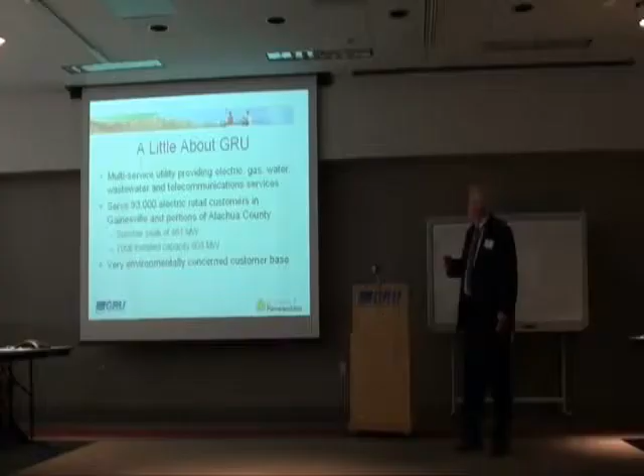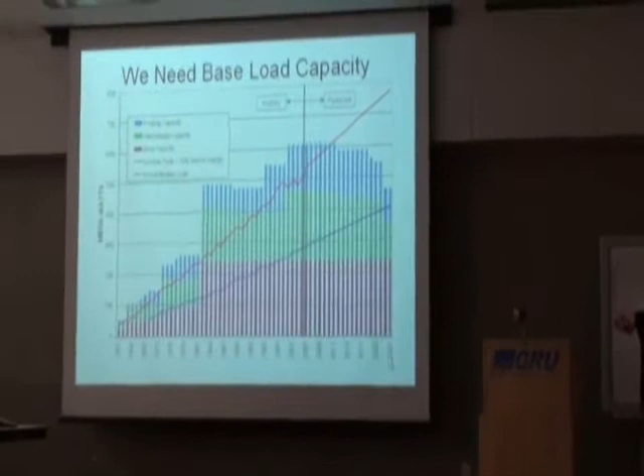We have a very concerned, environmentally oriented customer base. What started this discussion in our community was this: these bars show you our capacity - peaking capacity, intermediate capacity, and baseload capacity.

A lot of our units are quite old and are going to be retiring. This shows that we need base capacity by about 2020. When we started this process, we needed base capacity by 2011.

The curves have turned down because of conservation and the economy problems. But we still feel the need to go ahead with our biomass project because of the benefits it brings for system reliability - I'll talk more about that - because of our older fleet. So currently we have a lot of large contracts with other companies to firm up our capacity because of reliability issues.

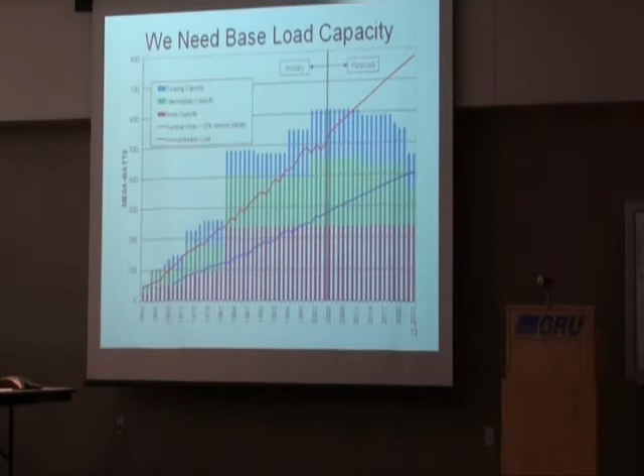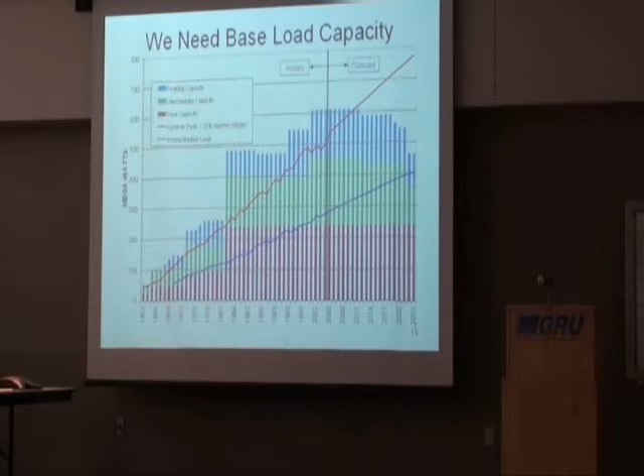The way you plan generation is you have to anticipate when your generators retire or your load grows. In America, we have to have something called a reserve margin, extra capacity. We put all our reserve margins into a pool, and we all share that, so that if one of our units goes down, people will back it up. But it's very expensive to do that. So based on that, we started talking.

The other criteria is fuel costs. This graph is a little bit old - gas prices are actually down a little bit from this graph. But you can see where the price of oil, gas, and coal are. About 65% of our electrical energy comes from coal.

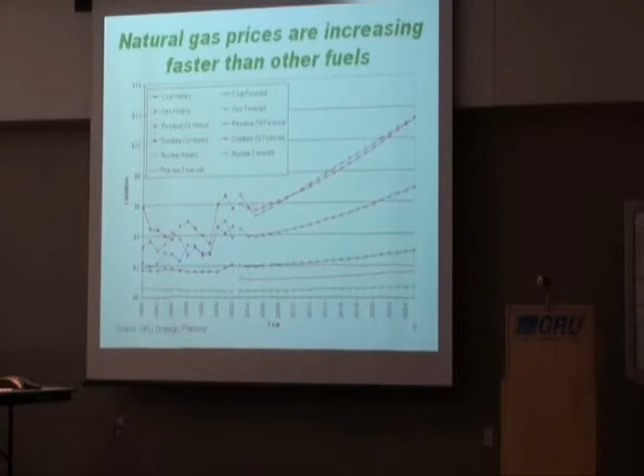When we started the dialogue with the community, we had this high cost of fossil fuel, a lot of concern about global warming, CO2 - we used to call that the elephant in the room. At some point, after looking at the options, the lowest cost option was coal. America has a lot of coal. We ship it down from Kentucky by rail to Gainesville.

But the City Commission decided that we, as a community, were going to meet the Kyoto protocols, which is to reduce our carbon emissions by 7% from 1990 levels. We've been growing a lot since 1990, so that's a pretty heavy goal to hit.

So we have two parts to our strategy. One is energy efficiency and conservation, and that's why we got into the district cooling business. Our district cooling plant makes electricity, it makes chilled water, it also makes steam because it's serving a hospital - 80% thermally efficient using natural gas. That's pretty good. So energy efficiency and renewable energy.

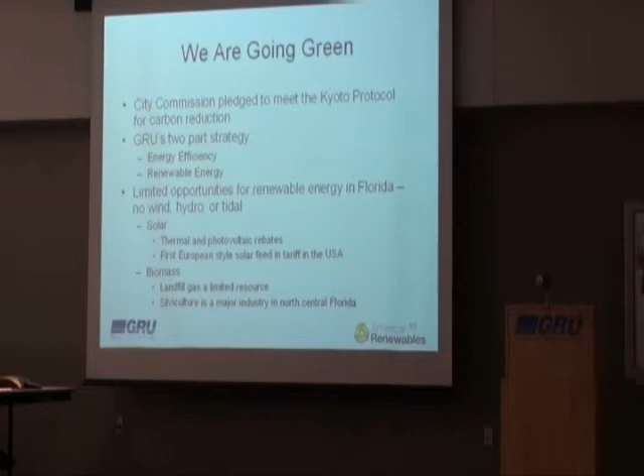I'll talk about renewable energy here in Florida. We don't really have much wind - today's kind of breezy, but most of the time there's no wind to speak of. It's very still. There's not enough wind to justify developing a wind project here compared to the Midwest or the coastal areas. We don't have any tides in Florida because of our latitude, there's not much tidal energy, and obviously we're not near the beach anyway.

Florida is a sedimentary state. There's no geothermal here - you have to go down 4,000 feet before you hit any granite at all, and there's no temperature down there to speak of.

So that means we have two choices: solar and biomass. On solar, we have solar water heaters where you make hot water for the house, and we have rebates for that. We also have photovoltaic, solar electricity.

I think you all are on what I would call a fact-finding mission. We went on a fact-finding mission to Germany and came back, and we adopted the first European-style solar feed-in tariff in the USA, which means we pay a price that makes solar profitable. So solar is going gangbusters in Gainesville.

In terms of biomass, landfill gas is available, and we're using as much of that as we can, but there's just a limited supply of landfill gas around here. We do have a project, for example, in a county south of here, where they collect the gas, make electricity, and then ship it to us over the grid.

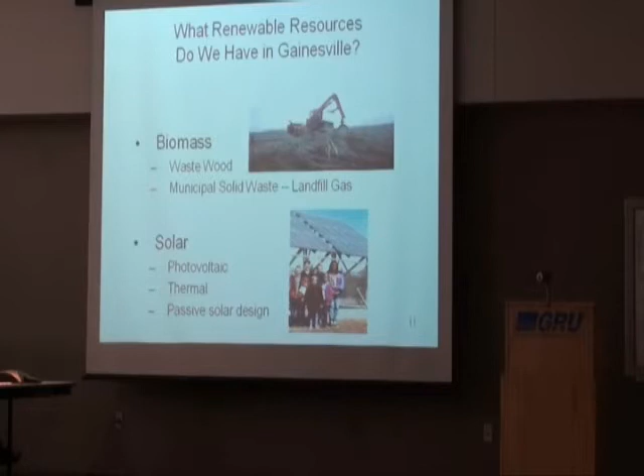I talked about that. We talked about solar, but I'm mostly going to talk about biomass. It's very available, it's cost effective. We believe that using certain forms of biomass is carbon neutral, and that's because what the IPCC considers carbon neutral has a lot to do with our biomass collection, and also because of our highly environmental community.

How do we preserve the forests? How do we preserve biodiversity? We don't want to do what Ireland did, cut down all the trees, or what England did. We don't want that to happen here. So we'll talk about how we protect the forests. We have a special program for that.

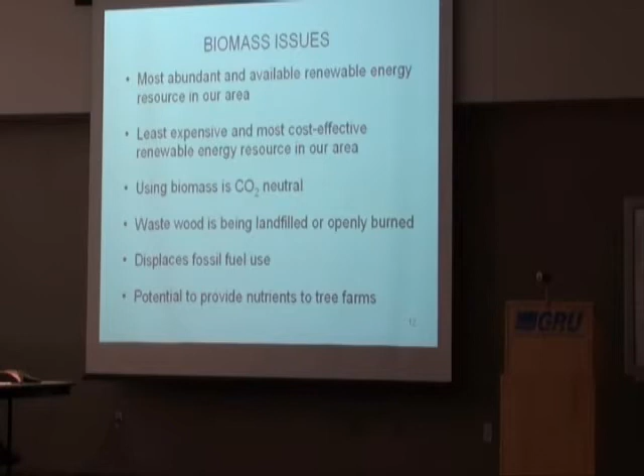We look at a lot of different species. The University of Florida is doing some interesting research with elephant grass in particular.

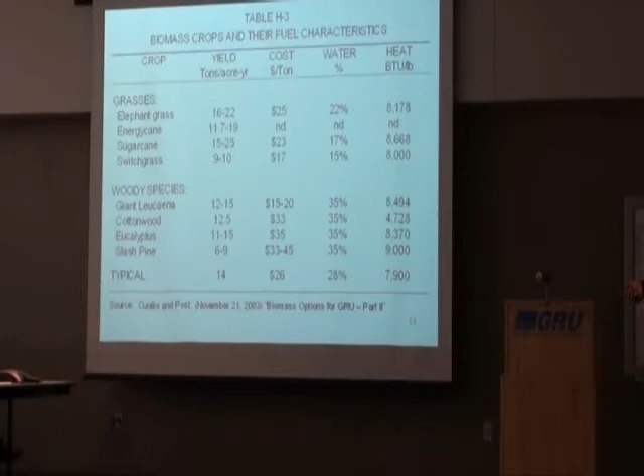There are times if you went outside it would smell like a barbecue because of all the burning going on in our area. A lot of NOx is emitted, and open fires like this produce a fair amount of dioxin. If you burn it in a controlled environment, you reduce the NOx, you reduce the dioxins, you reduce the particulates. So that's one of the appeals to the biomass plant that we have proposed.

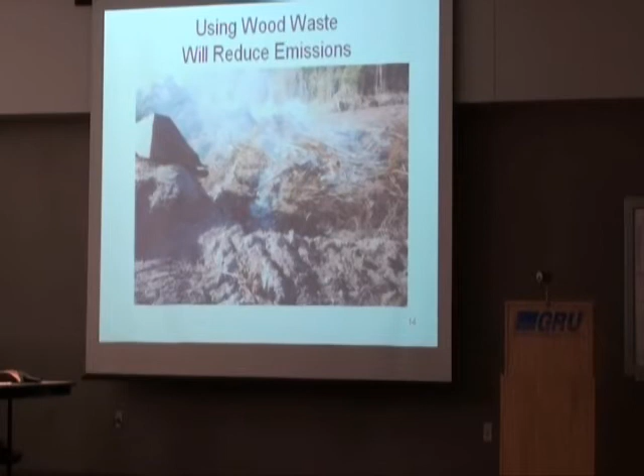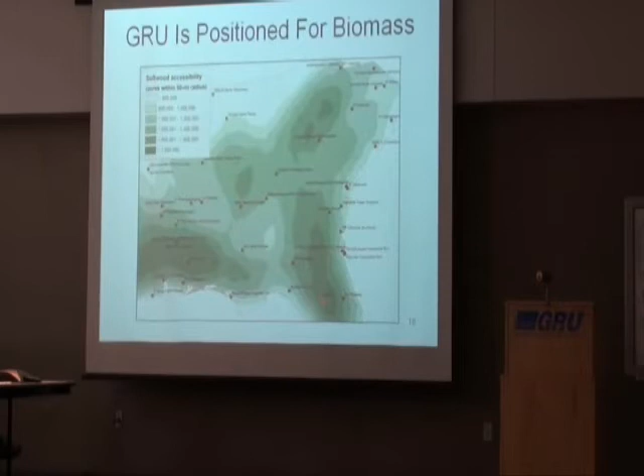By the way, this shows you how many tons of softwood are available within a 50-mile radius. You can see within 50 miles of GREC, this is us, the Gainesville Renewable Energy Center, lots and lots of biomass in our area. So we can doodle this till we're blue in the face.

There's lots of options. Do you want CFBs? Do you want bubbling bed? Do you want some kind of anaerobic digestion? What do you want to do?

So what we did is we opened a multi-phase process where we said anybody with any idea can give us a proposal. It would not be binding. In other words, if we picked you, you wouldn't have to produce at that price, because to get a lot of people to come and give us proposals, you can't make it too expensive to produce the proposal, particularly if you're doing smaller projects.

To have a proposal with pricing, if I said $250,000, you know it's low to produce a proposal with pricing. But we wanted as many ideas as we could get. So we did a letter of interest approach, where we got a wide range of technologies and all kinds of indicative pricing. What we discovered from that is that as a municipal utility, we could not beat the price of a private sector or investor-owned utility, because in America municipal utilities don't pay taxes, so there's no tax advantage.

And tax advantages are very important to the economics in our country. So we went through a multi-phase process where we got it down to three, and then competitively bid against the price. The technology that emerged is what these guys are going to tell you all about. We're very happy with it. It's a bubbling bed technology. I think the boilers will be made in Finland, right across the Baltic Sea. I hope I got that right.

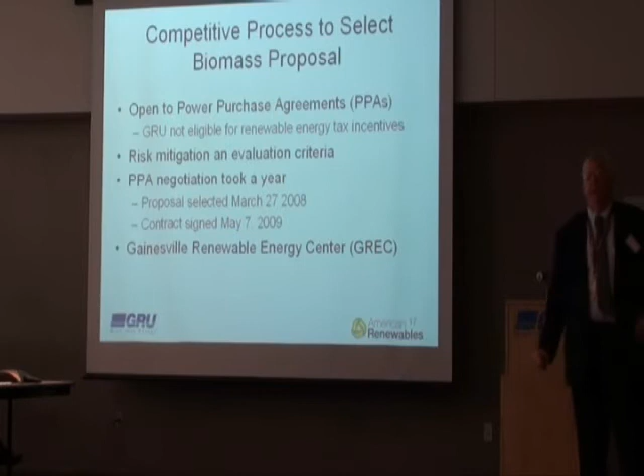This is it, this is our coal plant. Here's where the new power plant is going to go, 100 megawatts. And we don't own it at all - we lease the land, it's a long-term lease. American Renewables is going to build it, own it, operate it, and under a contract, we take all the output.

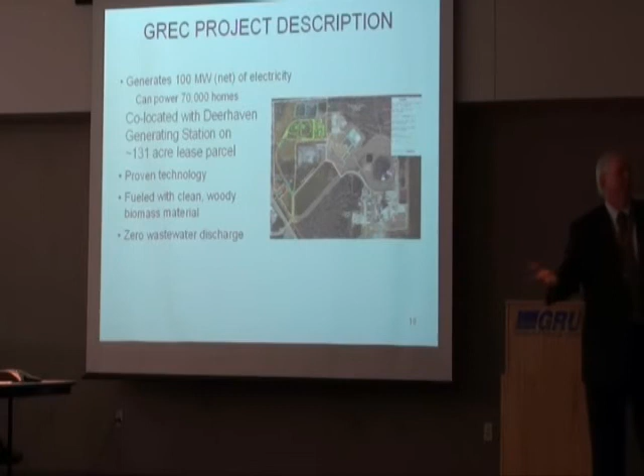It's going to be fueled with clean, woody biomass. An interesting thing about the site is that there is no surface water discharge. We take groundwater, use it for cooling, but because of environmental constraints, we can't put it in any streams. So we dry it out, then we have brine salts, so we landfill the brine salts. I don't know if you have anything like that in your country, but we use the water all the way.

I don't think I need to go through that. In the long run, we believe that this is going to be an economic benefit for our community. We negotiated the contract to be as fixed a price as possible. In fact, everything is fixed, except for the fuel component, which is market-based, and a small piece of the O&M, which is based on chemical prices.

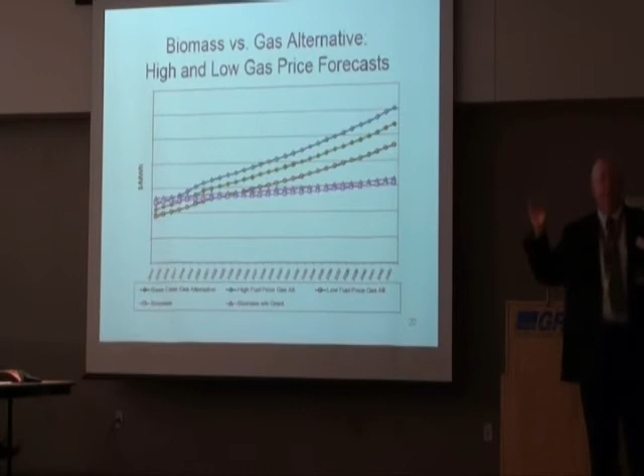When you compare that to our projections of what it would take to build natural gas combined cycle, this is comparing against combined cycle, which is going to be for the near-term future, looks like the market in Florida. In the early years, right now we're riding on this curve right here because gas prices are low. So when it comes online in 2014, it's going to be pretty substantially above market. Now, I want to note that this is not scaled because the pricing is proprietary. But the relationships are valid. And so we think it'll go into the market maybe 8 years out.

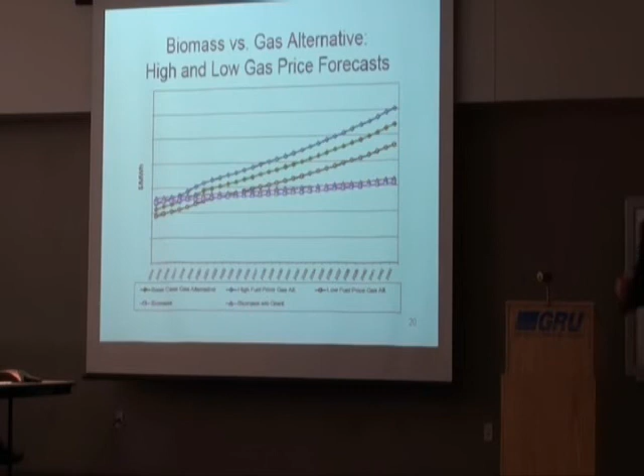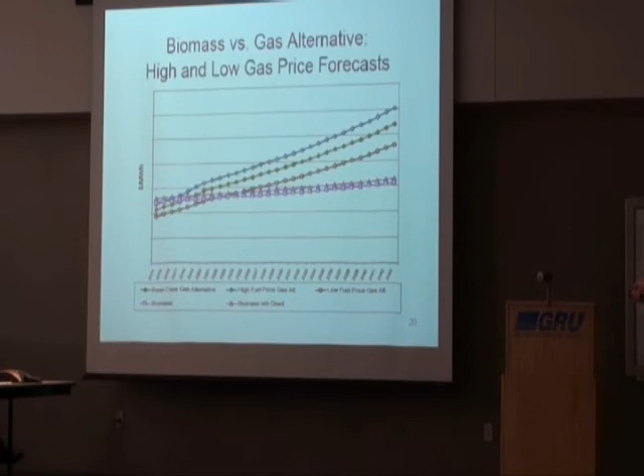And so you can see why the community of Gainesville is willing to step up and do renewable energy. If we wanted the cheapest cost power right away, we would do one of these guys right over here. And so we get the flat contract, but when we show you this line for natural gas, that's wrong. Natural gas looks like this, as you know, because you've got other people providing your gas. Whereas with the fuel contracts, it really does look like this. It's very smooth, a lot less volatility. That's a big benefit.

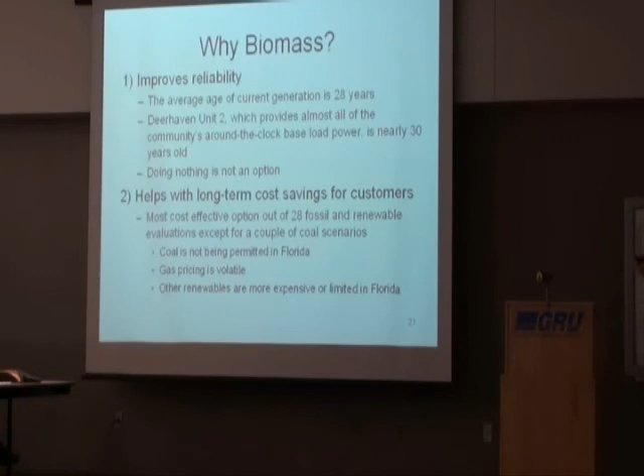Having a new generating unit of any kind, of any scale of a baseload unit will improve our reliability. It's a 30-year contract. Over 30 years, this has a lot of present value savings for our communities. Gas pricing is very volatile. And right now, new coal units, there's basically a moratorium on that in Florida. And coal is really having a hard time getting permitted in the United States.

It's going to improve our fuel diversity. So what we're doing now is there's also a 30% cost savings based on a tax incentive that is available from the federal government. In the fuel markets, if you're the first there, there's a definite advantage, particularly we'll be the first one out there signing up contracts for this material. And because we anticipate that, although it hasn't happened in Florida, there'll be a renewable portfolio standard, which you have a big one, 45% it looks like. And we think that in the long term, the United States will have some form of a carbon tax.

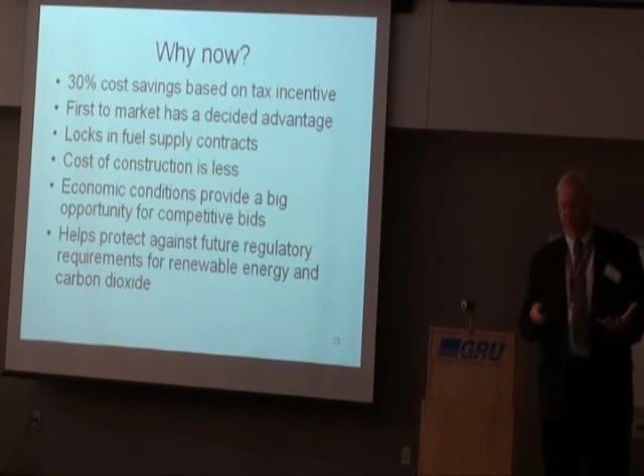It's going to create jobs in our area. Instead of taking our money and sending it away to Houston, sending it away up to New York, it'll stay in the local economy. It'll create 700 jobs. It has created a lot of interest already. People are coming from all over the world, as you may have noticed.

I just want to say a few things about the contract design. If this bores you, let me know and I'll stop and let the technical guys go. The counterparties are American Renewables, which there are 3 holding companies. I'll let Josh talk about that. We opted for 100% of the output.

We really didn't need 100 megawatts right away, but the bigger the unit, the cheaper per kilowatt. So there's a lot of economies of scale. And so we opted to take 100% of the output because we will eventually need it. We're going to grow into it.

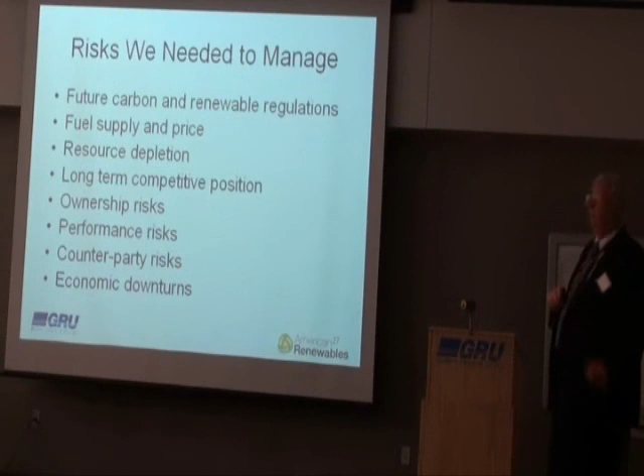The kind of risks that we manage with this contract: depletion in terms of will there always be wood, long-term competitive position, ownership risks. It's a 30-year contract. There's no dollar per kilowatt month charge. There's no fixed charge. You only pay for the energy that's produced. I don't know how that compares to your current practice. That's very unusual in America.

There's a constant non-fuel energy charge per megawatt hour, and then there's a fuel charge per megawatt hour, and a small variable O&M, and property taxes are passed through.

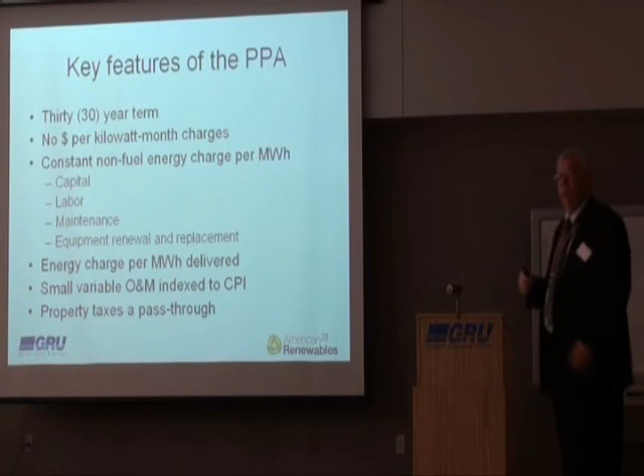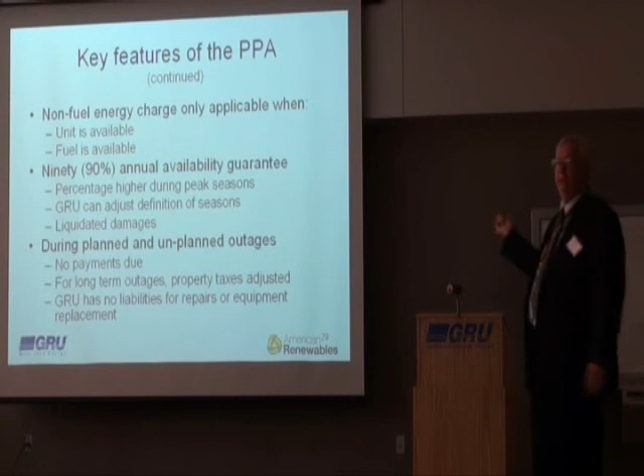If the unit breaks down, American Renewables takes the risk. If it needs a new boiler, they take the risk. There's liquidated damages if they don't meet the 90% capacity factor. We get all the environmental attributes, the carbon credits, renewable energy credits, any excess allowances, and unknown future regulations for change of law in these particular environmental attributes.